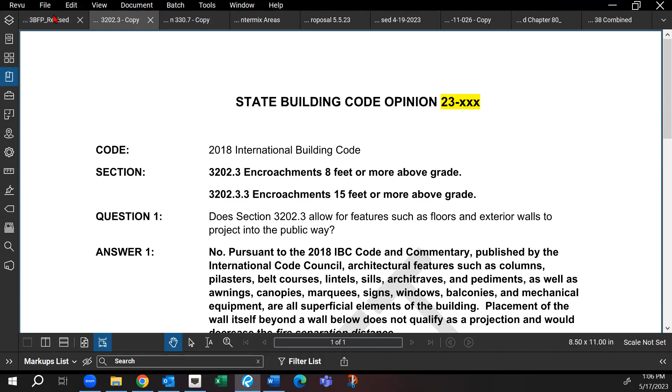Order, if I can say something. Sure. What if we start with agenda item 5, which doesn't need a vote? It's just a staff report that we will explain what we're doing with these 2 off-cycle rules. I like that suggestion, and since we don't have a quorum, we won't vote on it. So go right ahead and move on to item number 5. Thanks, Dorian.

All righty, so we've got the modify the definition and provisions of childcare, family home in the 2021 IBC and 2021 IRC. This should also include the 2021 IFC. So we had a meeting recently with the technical advisory group and the stakeholders, and I have some draft language here.

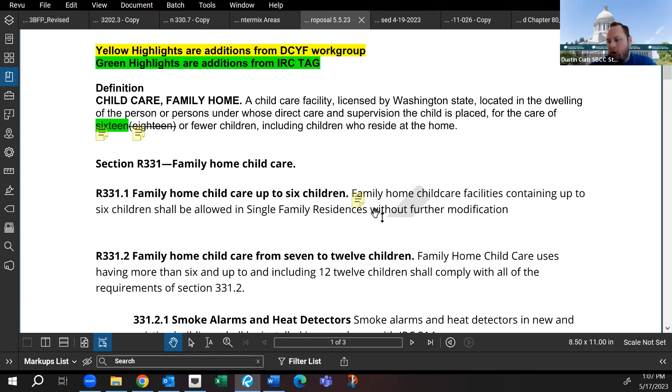The current next item up for action from the work group working on this is to come back and give a couple more options to the tag on increasing the number from 12 to 16 allowed within a residence and still remaining in the IRC provisions.

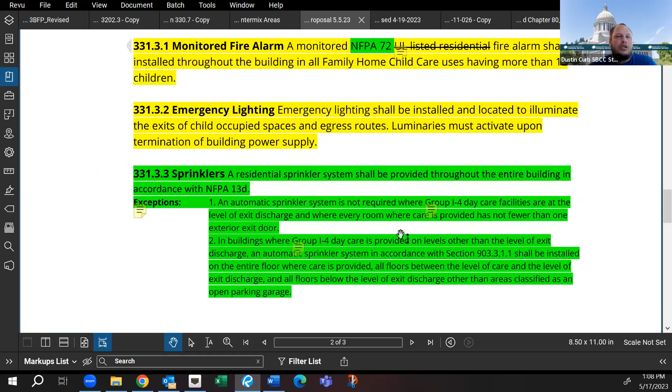Currently we have some disagreement between residential fire systems and NFPA 72 fire systems and sprinklers versus no sprinklers in these increases. So we're currently scheduling another meeting with the work group to come up with some alternatives that might be attractive to both the technical advisory group members and the stakeholders within the Department of Children, Youth and Families, who are the proponents of this change. And currently, that's where we're at, and we've been working pretty hard on this one.

But if anybody has any questions, I'd be happy to answer any comments, questions, or concerns.

Would that also be open to members of the public, Dustin, for questions? Yes, if they would like to ask questions from the public, that would be fine, I'm happy to chat on that one. So we'd open the floor for a few moments. Folks, if you want to raise your virtual hand, we will try to identify you.

We got Roger, please. Yeah, Dustin, if you can, both for my clarification, as well as everybody on the call, what are the next steps?

So the tag is working on this. Is there an assumption that potentially in a month from now or something like that, the tag will come to an agreement and then bring that to the BFP committee prior to it going to the council?

Yes, without having any other scheduled BFP committee meetings, I believe we'll bring it to the tag, and hopefully the tag approves it to be moved to the next step, whether they decide it's to be the BFP committee, which would be just the next step up, or to forward it direct to the council. I would probably yield to Stoyan on that one, which one would be the most appropriate.

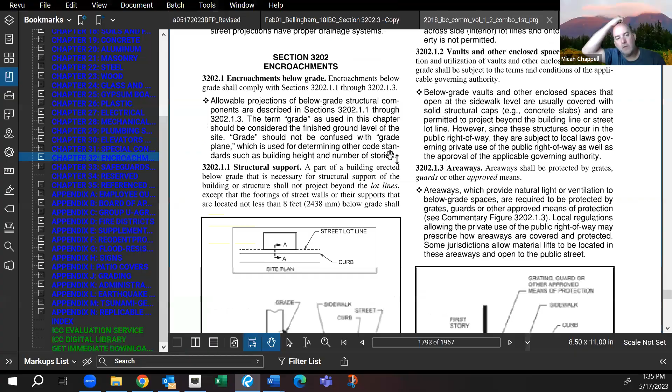Okay, thanks, Roger. And looks like Dustin's trying to pull up some commentary for us. Just so everyone knows, anything with diamonds to the left is commentary text, for those who aren't familiar with the commentary book.

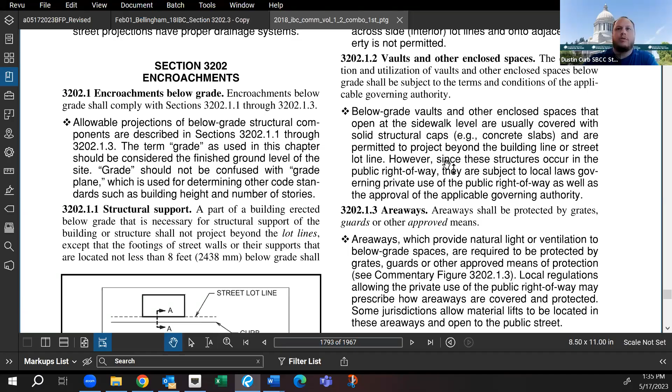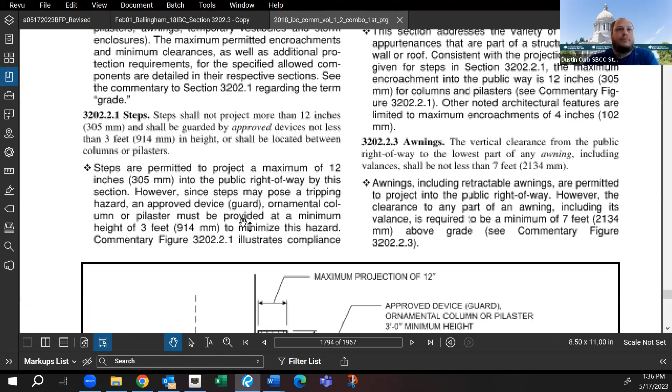So we're dealing with 3202.3. When we were drafting this opinion for the council review, a lot of research went into not just the commentary on the section in question, but into this whole chapter 3202 as a whole. We started with encroachments 8 feet or more above grade, but we were trying to look at everything here - it's been a few weeks since I drafted this original opinion. It was about looking at the whole section and thinking, how is this section drafted and what's the intent? The provision is to regulate a variety of structure encroachments and projections into the public right of way, such as sidewalk, parking lot, or street. 3202 addresses encroachments on street lot lines below grade, above grade below 8 feet in height, and 8 feet or more above grade. Encroachments and projections have to be taken into consideration in addition to the means of egress, fire resistance, fire protection, and structural and material considerations. The purpose of this chapter is to regulate projections and encroachments of structures into the public right of way.

So part of the talk is the line that we're projecting over - a lot line or property line, where we are dividing, like an easement on the property that the right of way is contained within. I believe there was some discussion at one point about who owns the airspace above property. So I was of the opinion that most of this stuff, me and Stoyan agreed on for the answers to questions 1 and 2. Question 3 kind of deals with anywhere above the right of way.

It was my personal opinion, after reading the commentary in the code sections, that if we were on a jurisdiction-owned public right of way, anything should not project over those lines. So option number 1 would be my interpretation, and option 2 would be Stoyan's interpretation of the readings here. It takes a lot of looking into all the different words and reading the shalls and mays, trying to put together an opinion that is rational and reasonable at the same time.

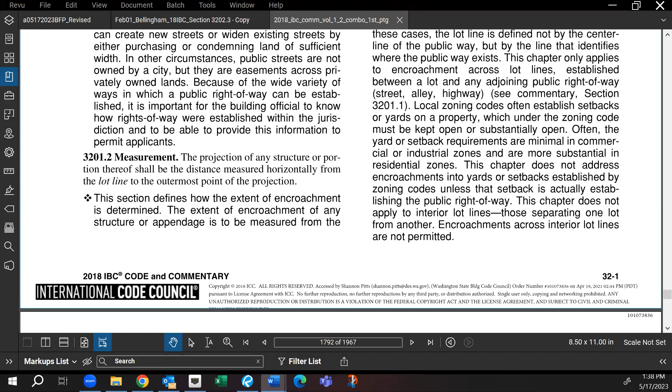And so I'll tail off there and let Stoyan add on to it. Again, the reason for option 1 and option 2 was not to confuse you, but to show you that it's a model code, and we rely on the available information, but it's subjective. We have 15 council members, and they may read it differently. So it doesn't mean option 1 is right or option 2 is right. We're just trying to say that we read this differently. That's all. I'm a very opinionated person, but...

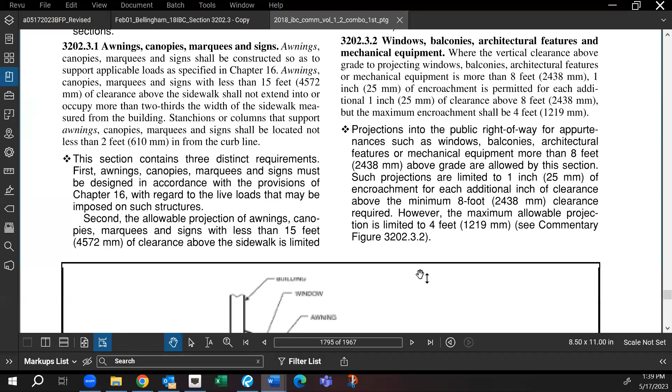I'm not going to fight for this option 2. It's just the way I read it at the moment and the way I understood it when I was researching it.

I guess if I could chime in there, I think one of the questions is, why specify the types of projections or the allowable features that can extend out into the right of way? I think by specifying that, it leads to confusion, whereas the 15 feet or above, it says shall not be limited. Why wouldn't you do that between 8 feet and 15 feet?

When you read the commentary, encroachments into a public right of way that are 15 feet or more above grade do not interfere with or impede the pedestrian or vehicle traffic, and that's the important part. They are not regulated by the provisions of this chapter. This was one of the things that made me believe that if they are not regulated, then you can do whatever you want. And there was something else at the beginning of the chapter that made me make the connection that the intent was not to regulate anything above 15 feet.

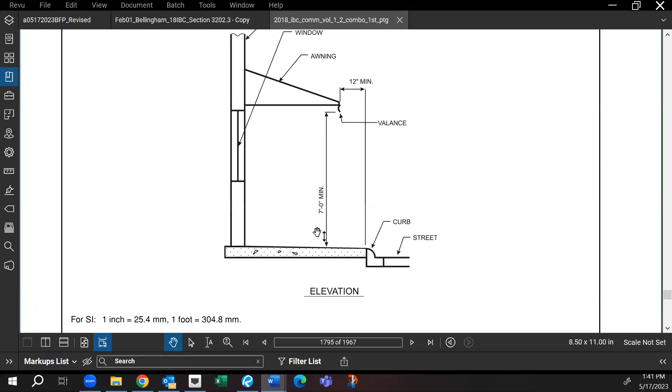And Dustin took a different approach. Dustin evaluated the main section, saying that because the main section is not applicable to the subsection, this is why he believed option 1 is the correct option. But again, we were trying to show you that we are dealing with a limited amount of information, and this type of interpretation is subjective. That's all.

Yeah, I guess that comment wasn't geared towards questioning your opinion, Stoyan. I was actually wondering why 3202.3.1 specifies the types of projections, whereas they could have just said any projection is limited to 2/3 and 4 feet, no matter whether it was a floor projection or any of those other more superficial items. It'd be nice to understand the intent of that section, how it came about, why specifying those particular building elements versus limiting some other types of building elements.

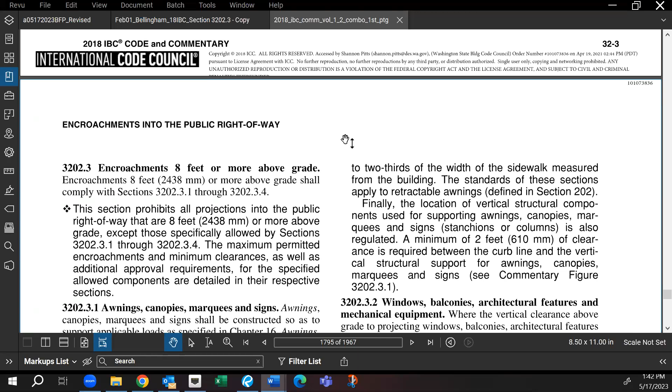Unfortunately, we don't have this information. And that's going back to my point, why I'm not going to defend my position here. It's because we are dealing with limited information, and we couldn't figure out what the initial intent was. Our judgment is based on how we read the code and commentary. You may ask 10 people, and they may give you 9 different opinions on that.

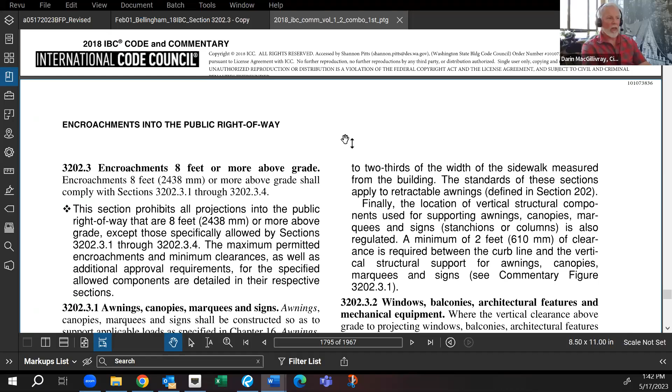Right, yeah, if I might add in here, the confusion kind of came in with the interpretation of architectural features. So if you look at 3202.3.2, encroachments 8 feet or more above grade, where the vertical clearance above grade to projecting windows, balconies, architectural features, or mechanical equipment is more than 8 feet. So architectural features was kind of the hang up here. What is an architectural feature?

And then if you go up to 3202.2.2, architectural features, it says columns or pilasters, including bases and moldings, shall not project more than 12 inches. Belt courses, lintels, sills, architraves, pediments, and other similar architectural features shall not project more than 4 inches. So it gives more definition to the term architectural feature in that section.

So I don't see that as being floors, structural portions of the building. These are features that are easier to repair, remove, replace, that sort of thing. So if, let's say, Public Works needed to replace a water main, they had to get their equipment underneath, and the equipment had to be below 15 feet, then it wouldn't infringe on their ability to do the work they have, without major damage to the building or making it impossible to get underneath there.

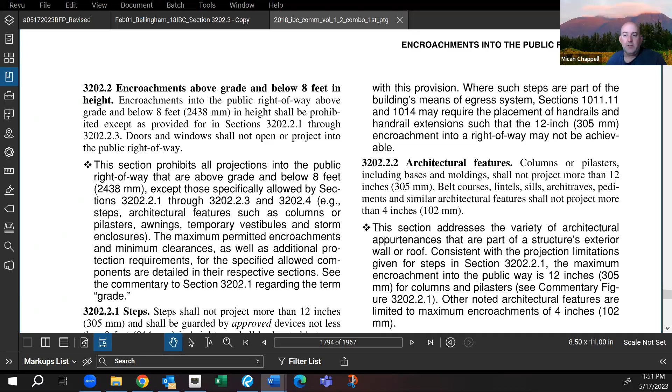It's not an architectural feature, it's a floor, and floor is defined. I think that came up a minute ago. What is defined and what isn't defined? Floors are defined, and I think when it talks about floors and projecting floors, then you could have usable space underneath that projecting floor. Again, in my opinion, floors are not a projection, especially at a certain distance.

Once it creates that usable space, and what's that distance? I don't know, a couple of feet maybe.

But I think there's a lot more in this question that we're not getting to than what we're providing an answer for, and I think this opens the door for a lot more questions, because I think the answer, at least to number 1, is specific to architectural features, but that's not the question. Because a floor and an exterior wall, in my opinion, is not an exterior feature or an architectural feature. It's part of the structure.

But again, I could be swayed somewhat. I have other hands up, Todd, and then Jon.

To me, it seems like when they did specify those things in the code, they were kind of producing an intent there of what they intended. What keeps running through my head is that all of those things listed in there that are permissible are things that, let's say, a truck going down the road, if it hit that, it's not going to take the building down. But if there were a floor sticking out and a truck hit that going down the road, it could cause some pretty serious structural damage to the building, a twin tower situation in the worst case. So it seems like when they talk about all these more or less superficial design elements that are protruding out, the intent is that they're not structural in any way. That's the way I read it.

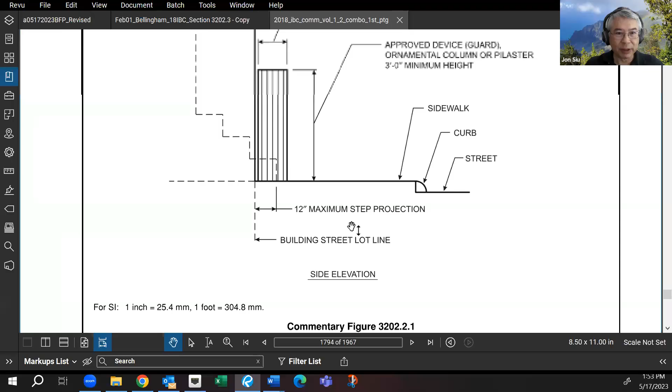Interestingly, one of the things they do here is add commentary to the commentary. They've said these are ornamental columns or pilasters, which I would agree would be an architectural feature. I would probably agree that we don't want to start calling structural columns, real structural columns, or floors the same thing. But even floors, I still think you could argue what's a floor in some cases. Anyway, this is ICC's opinion, or a staff person at ICC's opinion, and they've added this little ornamental thing that's not even in the text of the commentary. So it does get a little confusing. It's really hard to figure out what's really intended.

But I would not call anything truly structural. There's going to be secondary structure and all that other stuff, but I probably would not call those architectural features.

Go ahead, Roger. Sorry. Yeah, I didn't know if I was next. So you all have convinced me, and I've changed my mind, which again tells me, who knows.

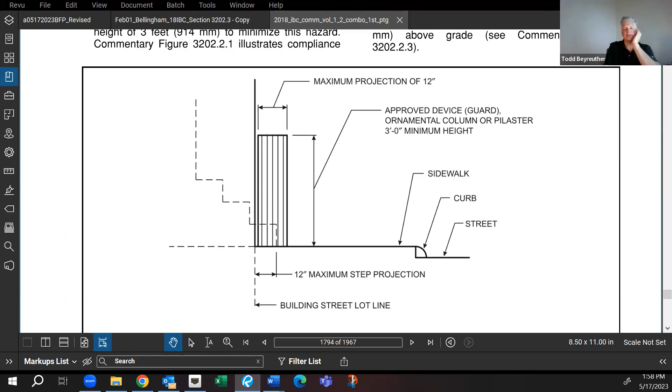Are you asking in general or asking specific folks to answer that? No, that's the one area I need just a little help with. I think it seems very clear to me that encroachments are allowed above 15 feet, which means that the IBC does not limit them. They're limited by something else, development code, whatever it might be.

Okay. For me, I think that would have to come down to what you define a projection as. But well, maybe Jon will answer, he has his hand up to that. But I don't want to skip over Darin, if you have some thoughts on Todd's question.

Yeah, I do. Something that kind of dawned on me is we're talking primarily about structural. So we're looking at architectural elements that can be removed versus the floor and structure projecting out. But as soon as you have a floor that projects out, you're also going to allow for electrical, plumbing, and mechanical elements too that would be in that floor system or in the wall that projects out over the public right of way. So at that point, it's not just the building, but also those other elements that are exposed. That really further drives the point home for me. My understanding is that the floor should not be projecting beyond the property line below 15 feet, for all those other reasons beyond just the structural part.

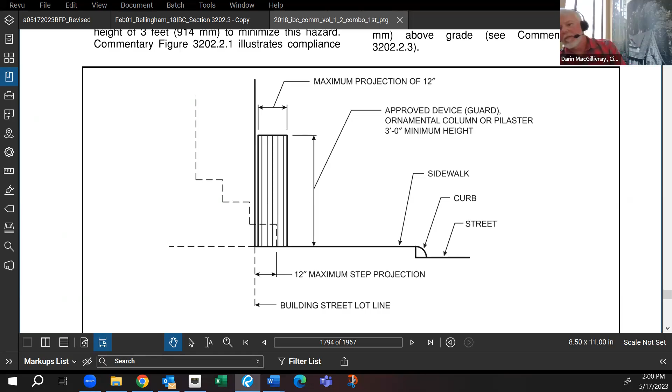I think 3202.3 is very clear that it is allowed, and there's no distinction, right? It's just simply encroachments. There's no distinction about features or architecture or anything, right? Yeah, the whole structures section is included. The whole section 3202.3 is about encroachments. It does not specify projections, which kind of adds the confusion. And I suspect some of that is, shall I say, carelessness in code development. It's because we don't know. Again, it's making it much more ambiguous.

You know, people, when they write these things, someone asked the question one time, why did they name those particular elements? Well, usually, and I know from personal experience, when you write something addressing a problem you've got and the things you've seen, you're not picturing these other things. So you write the code section around solving this one problem, but then someone comes by and says, what about this? And oh, I didn't think about that, that wasn't really the intent. And then you start arguing about that.

But above 15 feet, I think the code doesn't regulate it. I think that's pretty clear. Now, again, in Seattle, we didn't have a problem with that because our transportation department kind of regulated everything up, from ground to sky, and even below, right? So we didn't have to worry about that so much. We kind of deferred to them.

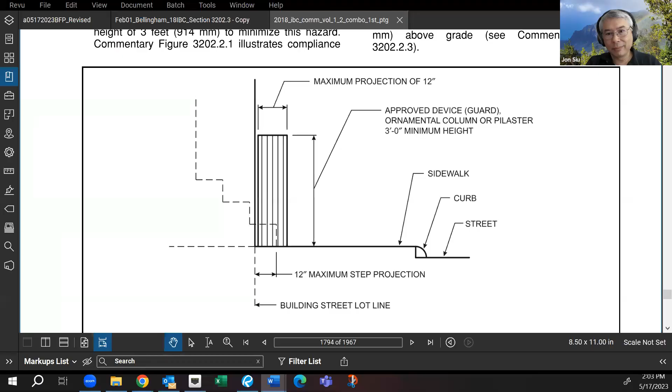Sorry, I'm muted. Thanks, John. Sean, sorry. Hey, yeah, so as this discussion progresses, I'm just thinking about this section, encroachments.

If you read the beginning of this section, it starts about below grade encroachments. Then above grade within 8 feet, then between 8 and 15, then 15. But where it starts below grade, structural supports are allowed to project 12 inches beyond the lot line. I think the intent is that if there were allowances for other structural support, they would note that in these other sections, but they don't.

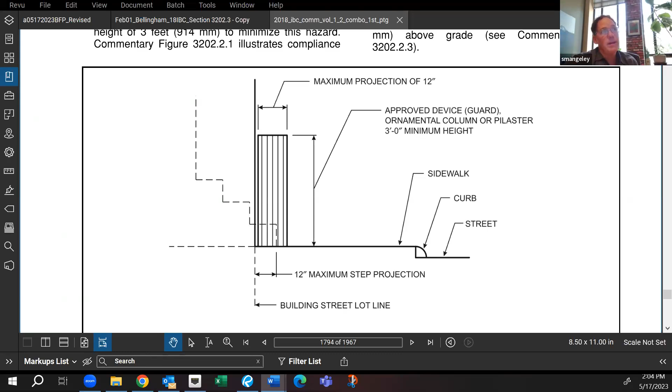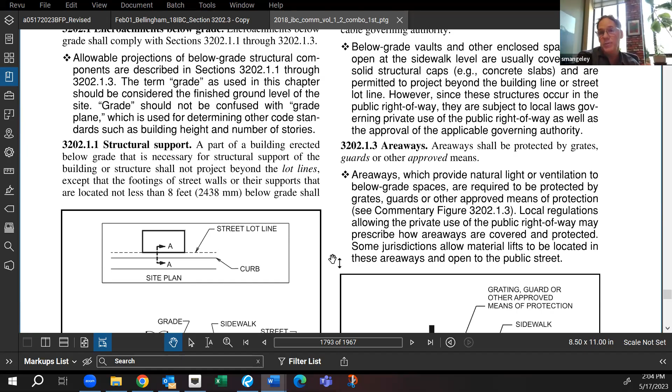They talk about vaults or other enclosed spaces, areaways, and then the next section is encroachments above grade and below 8 feet in height, which is very specific to architectural features such as steps, pediments, that kind of thing. So if your shear wall line is built at the property line, exterior wall components such as brickwork, lintels, stuff like that are allowed to project over. Then it goes into awnings, and then encroachments 8 feet or more above grade. So it's almost a gradual evolution of the building, starting from the structural standpoint below grade. As you work your way up through the building, it's telling us which elements, which features are allowable beyond that property line.

Does anyone else see that? Does that make sense? I would like to comment that I think using the term property line versus right of way, the edge of the right of way, confuses it.

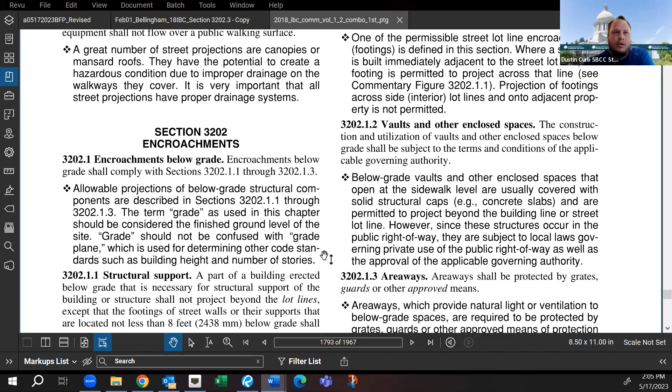So when we look at the commentary on 3201.1 scope, it applies only to encroachments on the public right of way, not lot lines or property lines. I guess I should have said lot lines, because at the very end it says beyond the street lot line, as far as those projections, not more than 12 inches. I think that right there changes a lot of the way I feel about some of it.

It's whether we're talking about a jurisdiction-owned right of way, or an easement onto a piece of property that establishes the right of way. I just wanted to point that one out.

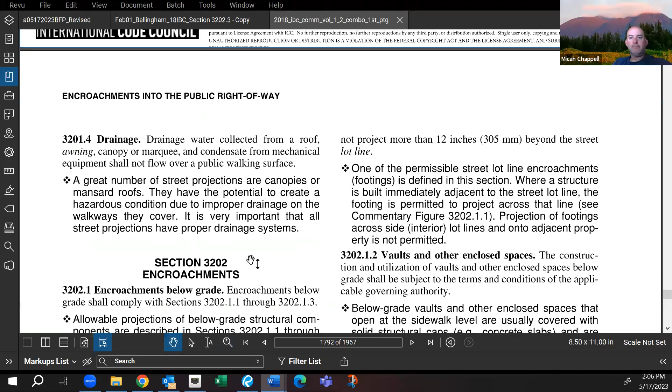Okay, thanks Dustin. Yeah, I'm struggling a little bit with that, Sean. I do agree with you, and I see that's how the code goes, but my item that I'm still stuck on is nothing in those sections, as you progress, indicates floor. So that's still going to be my argument. Okay, Roger, go ahead please, sorry, I didn't see your hand.

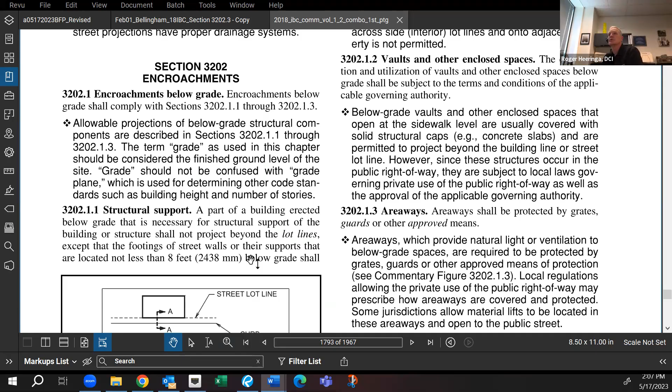Well, Micah, my comment is, and again, I'm wondering if we want to offer opinion, because as I read it I go back and forth. But your comment, Micah, about floors, I would significantly argue that a balcony, which is allowed to project, is primary structure. There is a primary structure for the balcony.

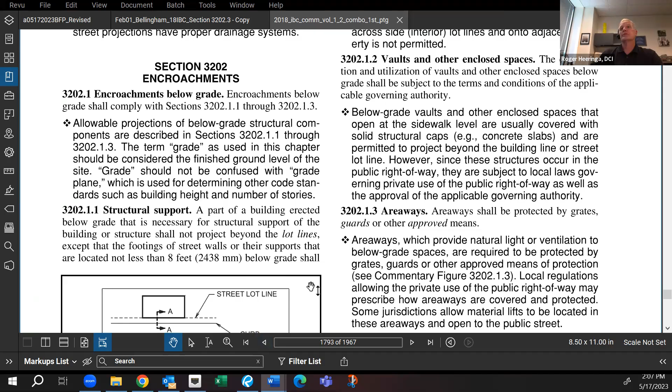Maybe somebody else knows more than me, is that area not building area, but is it rentable area? I think developers rent it as area. I don't know, I'm on the periphery of those conversations. But a balcony, which is allowed in 3202.3.2 to project, there's primary structure for the balcony. It's designed for a live load per the code, it has to be fireproofed. I don't remember all of it, but it has to be protected from a fire perspective.

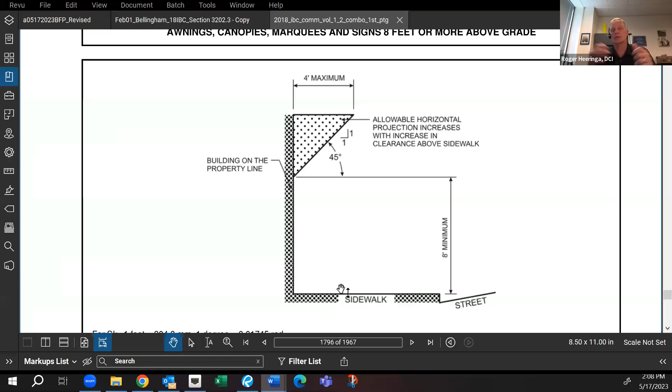So the direction we've been heading in this conversation is that primary structure has to be set back and can't be projected, and John, I kind of like John arriving at the envelope idea, that's kind of the line. But now I look at balconies, which are allowed, and that's primary structure, that's fire-rated structure, designed for live load per the code. So I'm leaning towards saying we don't want to offer opinion and push it back on ICC. I don't know.

Thanks, Roger. Good points, good questions. Darin?

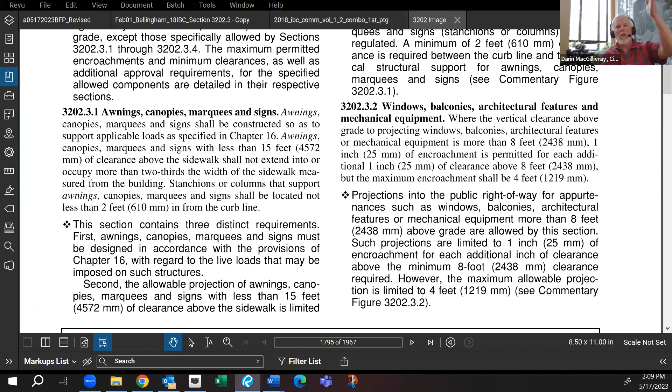I agree that it's designed for live loads, but the dead load of it is only the weight of the balcony. So the dead load of a floor that's projecting out would be supporting walls up above it. So that would be the difference there, in my opinion. And then the dead load could be 3 stories of wall up above it. So I would make that distinction there.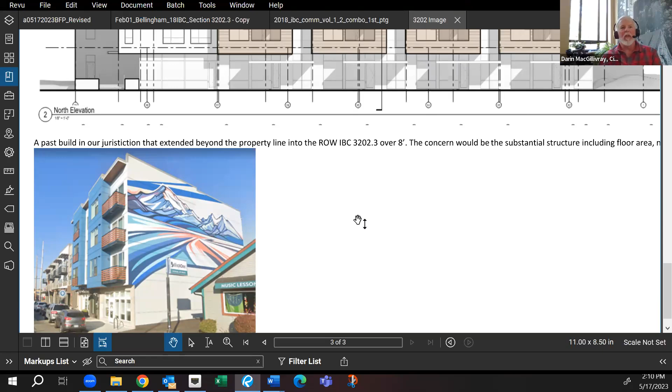But then the upper floor, half of that projects out into the public right of way. And he's proposing a very similar thing on the building above, but they're at 13 feet to the underside of those shaded elements. On the right side of each one is a balcony, but the left side is actual floor area that is interior to the building. So that bottom floor that's closest to the sidewalk is part of the structural floor projecting out beyond the lower wall.

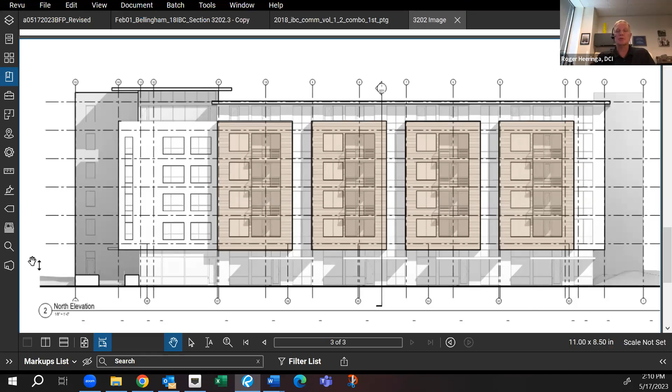Thanks for that info. I just wanted to respond. Your assumption, Darin, that the balcony only supports its own dead load is not always the case. If we have a post out at the corner, whether that goes all the way down, you could design something like a steel cantilever at the lowest level and then do posts on the balconies above. So it's not always going to be the case.

Yeah, and that's where I'm looking for the clarification too - was it supporting... if the balcony is only supporting its own weight and the live load, then I don't have a problem with it projecting over the public right of way, because it seems to clearly allow that under 3202 or 3202.3. So it's just whether it's supporting a larger dead load of the building above. That's where my concern is.

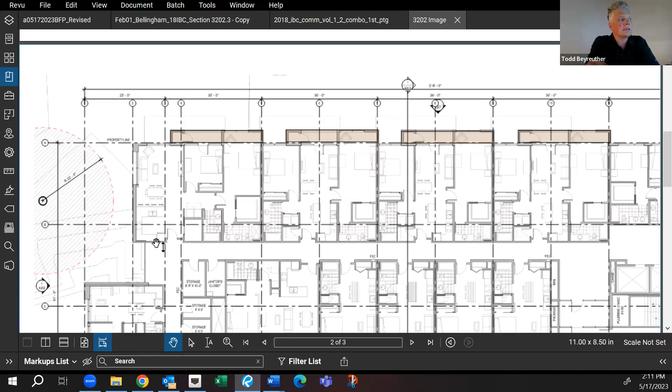Hey Todd, yeah thank you. I think I'm leaning towards Roger's point of not taking a strong opinion on this, because one, I think a lot of these concerns should be for local jurisdictions and development code, or other local agencies. But two, I don't think we really need to get into this architectural versus structural. I don't think that's the real question here.

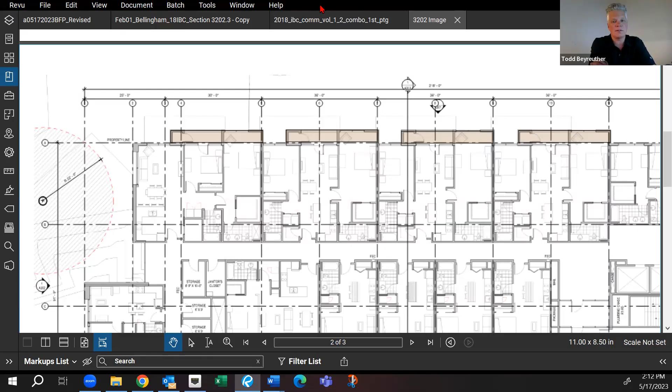Again, going back to 3202.3.3, I don't think we can say a hard no, because encroachments are allowed, and I don't think that speaks to any distinction between structural or non-structural. But on the structural part, again, I'm just going to stand by that - as a structural engineer looking at this, a wall is structural. It is dealing with out-of-plane loads, at least at the very minimum.

It's supporting a window, same thing. It's taking structural loads, and then obviously that's primary. I mean, and then anything else is still structural. Anything hanging off a building still requires structure. So I don't like going down that pathway of making the distinction necessarily to come to an overall opinion.

Below 8 feet, if that's really the question, I think it's fairly clear what the building code teaches, but again, I don't think that helps on the development code side. I guess what I'm saying is I don't know that the answer is no on 1 and 2.

All right, thanks Todd. Any additional thoughts or discussion?

I would like to say thank you for taking this question and spending so much time discussing it. It's been very good feedback for us, and it's been very helpful, although we didn't come to a definite conclusion at this point, but thank you anyway. I appreciate it.

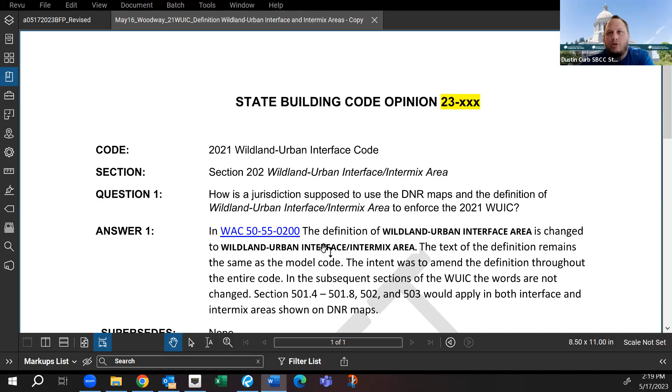In distilling their question, I have it as: how is a jurisdiction supposed to use the DNR maps and the definition of wildland urban interface/intermix area to enforce the 2021 WUI code? For my answer, we've talked with Micah a little bit about this outside of this group.

What I have for this jurisdiction is that the definition of the wildland urban interface area was amended in our WAC to be wildland urban interface/intermix area. The text of that definition remains the same as the model code definition. The intent was to amend the definition and have that meaning apply throughout the entire code, similar to how we amended out the R4 occupancy, but nowhere else in the code was the change made, so that was indicated to be deleted.

So in the WUI code, specifically sections 501.4 through 501.8, section 502 and 503, the word 'wildland urban interface area' was not changed in our amendments. And so currently it still reads wildland urban interface area.

Well, the DNR maps have a wildland urban interface designation and an intermix designation, the red and the yellow sections. So if I was reading this without having talked to Micah about how it was supposed to apply, one might interpret that if you have an intermix area, the requirements where it specifically says wildland urban interface would not apply to your construction areas.

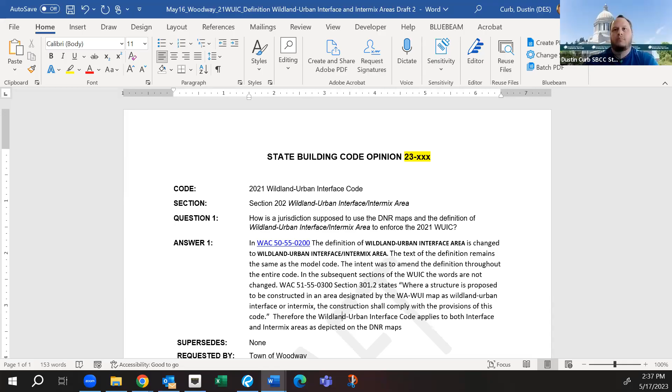So reading this a few more times, I do have a few other recommended modifications. We have a lot of sentences in here that I think can be combined. If we go up to where it's in bold, where it says wildland urban interface intermix area, I would change that to have a comma and say, however, the text of the definition remains the same as the model code. And then I would remove the sentence that says the intent was to amend the definition throughout the entire code. I think we still get there with a clear answer.

It talks about the definition being the same. The subsequent sections of the WUI code were not changed, but it gives you the section that states that it applies for both. And the answer, in the last sentence that Tom added, is that the WUI code applies to both interface and intermix areas depicted on the DNR map. I think that's clear enough. That's my opinion. Other folks can chime in.

All right. Does that work for you, Roger? I know you had some input in, Tom. Get us there. Okay, yeah, fine with me. Okay.

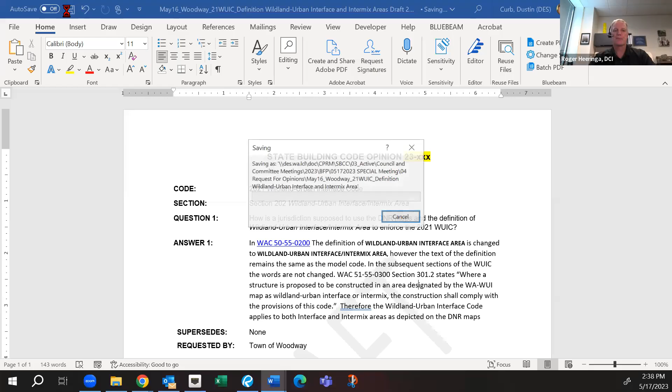I think with that story, this would be the BFP's recommended version. However, we don't have a quorum for a vote, so we can't say it's a BFP recommended version. We will say it was discussed and it's the staff draft based on the opinions shared during this meeting. Does it sound good? Sounds great.

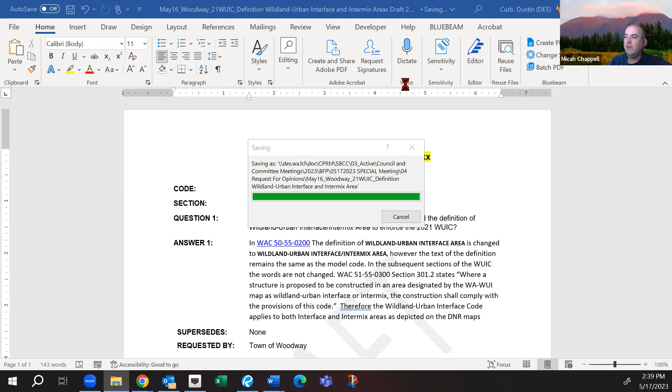All right, thank you very much. Thanks for your editing, Dustin, and input from everyone on the call. All right, let's move into the last bullet point of item number 4. It's also an opinion request for IRC section 330.7 and fire apparatus.

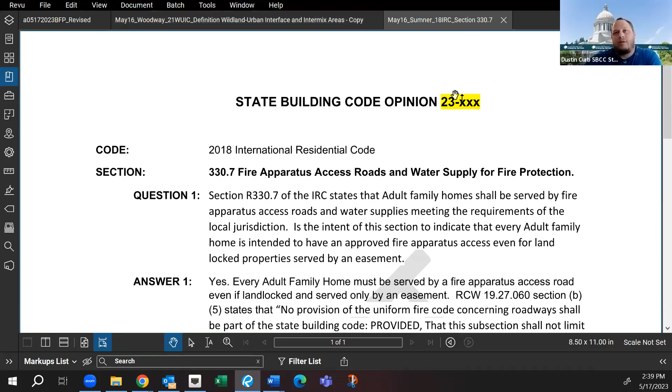So, while we're waiting on this to upload, City of Sumner asked the question for adult family homes. The requirement of IRC amendment 330.7 indicates that all adult family homes are required to have a fire apparatus road. Some of the background is in RCW 19.27.060 section B number 5: no provisions of the Uniform Fire Code concerning roadways shall be part of the state building code, but that doesn't prevent local jurisdictions from adopting standards for their street, road, or access standards.

The particular issue here is they have a project on a landlocked property that is served only by an easement. Their question is, even in this scenario, does an adult family home require the fire apparatus access road?

The answer I have here is yes. Section 330.7 doesn't have any exceptions or anything like that. Every adult family home must be served by a fire apparatus access road, even if landlocked and served only by an easement. I quote the RCW saying that they're allowed to adopt some sections for their fire apparatus access roads, and I said thus the fire apparatus access road that is required must conform to the locally adopted standards for such roads.

Thanks, Dustin. Just want to ask if anyone from the city of Sumner is on the call to provide any additional input. I do not have any of those folks online with us. Okay, we'll open the floor for discussion.

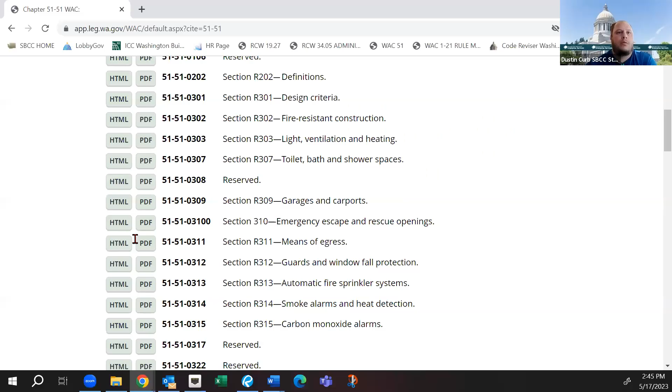It says shall be served by fire apparatus. I hear what you're saying, but I don't know, I think that would be up to the local jurisdiction. If they don't have provisions for fire apparatus access roads, I don't know.

As an AHJ, I have the ability to say I'm not requiring a fire apparatus access road, and I might have something in lieu of. But this particular jurisdiction does have standards for those roads.

But that's the whole thing, they're asking a generic question. You're stating a case for just the city of Sumner. The question was, is the intent that all adult family homes have to have the fire apparatus access road? The answer should be yes, complying with the local adopted standards.

That's kind of what I have at the end. But I don't know if I'd want to put in the landlocked, served only by an easement, all that.

So I agree with where Ken's going with this. This is what Ken is indicating, this is not a yes answer. When you look at the first sentence, it says, is it to indicate that every adult family home is intended to have an approved apparatus access road for land, even served by an easement, blah blah blah. Ken's answer is it depends.

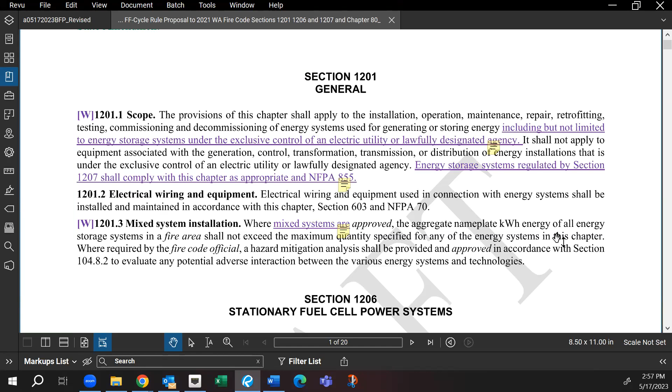Oh, no, sorry. Yeah, so Ken might want to. For this agenda item, let me clarify something. We will need a formal decision by the BFP committee. I mean, it was discussed several times. I know Ken is still upset with me, but...

If there is not a formal decision by the BFP, we can introduce it. I think it's in the agenda for tomorrow, right Dustin? I believe so, so we can introduce it as is without any BFP recommendation because we don't have the quorum. If the BFP committee members want to unofficially discuss it, that's okay too, it's up to them. But this is an important item that we were really expecting a BFP recommendation on.

So how it will be introduced to the council tomorrow, we'll say we don't have a BFP recommendation, and the council can skip the BFP recommendation, or the council can refer back to the BFP. I don't know, these are the two options that I see.

Okay, and I sure hope you mean council meeting on Friday, if not my schedule's all messed up. Yes. Okay, just making sure, we don't need another one tomorrow.

I'd assume Ken would probably want to chat on this one. Yeah, my feelings right now are I don't want to spend another hour and 10 minutes going through this like I did at the tag meeting. I know Micah was involved with the small changes that were made to it. And if right now the council can't act on this Friday for an off-cycle rule, then my recommendation is, because we're not having a quorum, it is so important that I think it reaches the emergency rule.